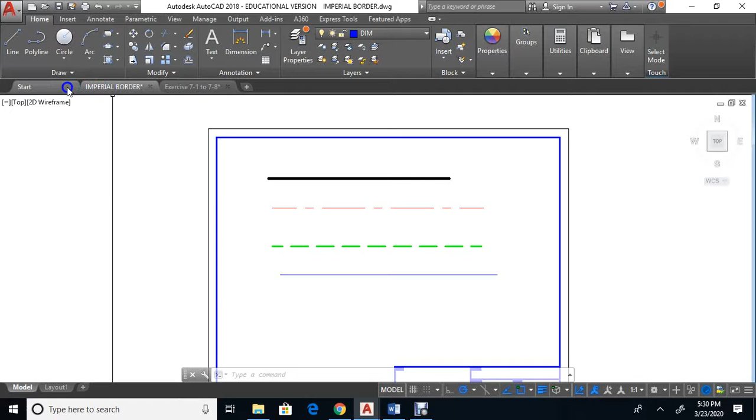In the last video, I showed you how you can use these layers up here to create different line types. Now let's say you start a drawing from scratch, so you don't use my border. Instead, you go to start and do a drawing from scratch.

So just click here, you start a drawing, and you have this grid. I'm just going to eliminate the grid down here by clicking on this. Notice in this case, there are no layers.

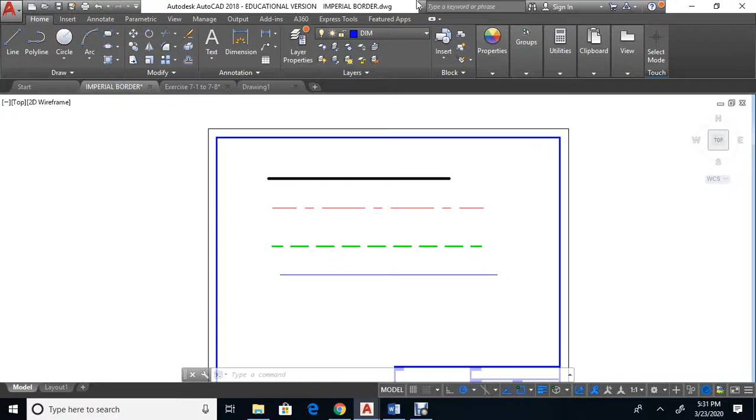Well, let's go back to my imperial border that I created. We'll just click on it. We have several layers I created, so you're always welcome to use my imperial border with the layers.

But if you want to start from scratch and create your own layers, let's go back to start. In Drawing1, we'll go back here. And you don't have any layers, so I am going to show you now how to create the layers.

The first thing you do is click on this little icon here, layer properties. So you click on the layer properties, and another screen is going to appear. On this screen, you can create a new layer by clicking right here. So I'm just going to click there, and then I can call it whatever I want.

So I can call it maybe dashed for dashed lines. We're going to create a dashed line layer. Now over here, I can pick the color of that layer. I click here, and I can pick whatever color I want. There's so many colors to pick. Maybe I'll just pick yellow for this one. I'll hit OK, then I can change the type, the line type here.

I can click on here and load more. So instead of these, you can load more. You can go looking in here for a dashed line, searching until you find a dash that you like. Maybe I'll take this one here, dash 2. I'll go OK, and I still have to pick it.

Then I go OK. Over here it tells you how thick you want it to be printed. So here you can pick the thickness. Maybe that one's 0.2. Maybe the first one here, 0.1, I'll make thicker. I'll click on this and make it thicker like that.

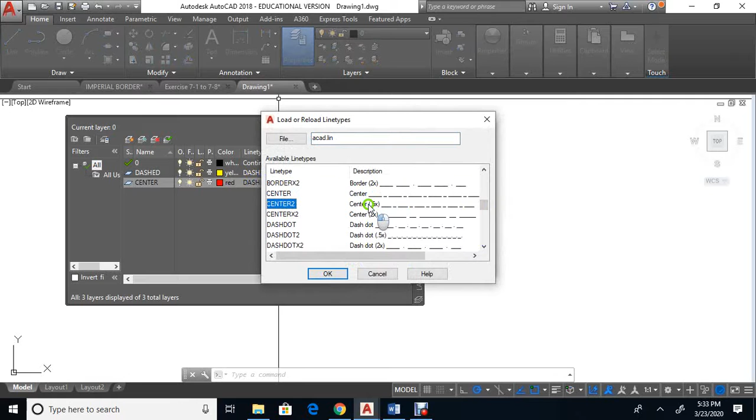I'll pick a center line here. Since it's not here, I'm going to load some over. I come down and pick this center line, pick the 0.5, and go OK. Then I'll make sure I pick the center too, and go OK. I want it probably the same thickness as that. I've got 1, 2, 3.

I'll make one more, so again you go here. I'll make one last one. I'll just call it a crazy layer, make something crazy. We'll pick some color I probably never use, maybe this orange kind of color. You might use it, but I don't think I ever will.

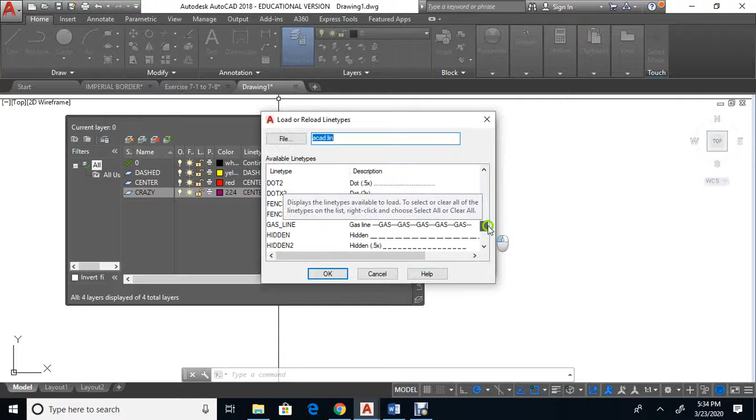I'll pick that. And over here, instead of center, let's load and see if there's something interesting we can use. Let's keep going through. Oh, there's batting. Let's see what else. There's a gas line you can use, HW. Let's use the zigzag. I'll pick the zigzag, click on it, and go OK.

Now let's take a look at what we've done. Let's go back to our drawing, so we'll X this. If you want to come back to this, you can always click on layer properties to return. You can click on one of these and delete them if you want, hitting the delete key or the X over here to remove them.

Okay, there's a new layer button, and there's delete layer right there if you want. So let's go back and see what we created. First, we'll draw our first line using the 0 layer.

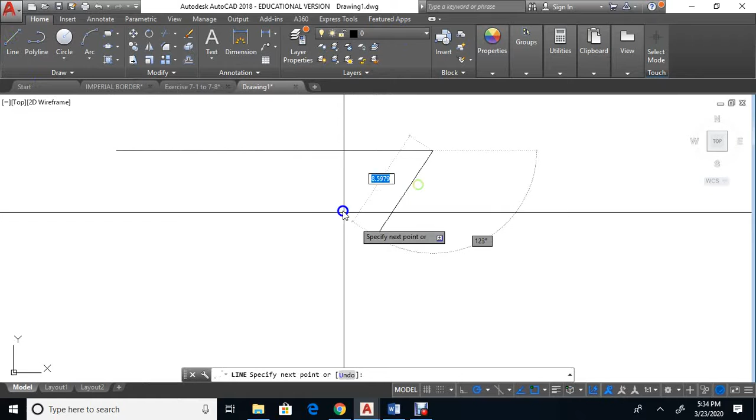Now we'll switch, while we're in the line command, to another layer. We'll switch to the center layer. Let's see what it does. Oh, it creates a red line, which is a center line. We'll go to the crazy layer next. Oh wow, it creates a zigzag line. Then we'll switch over to the dash layer, where it creates a dashed line as you move through.

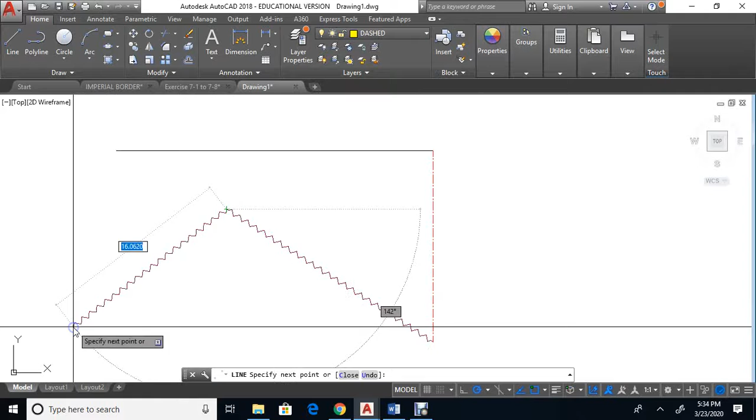Now, if you want to change the size, I will show you right here. You can type the word LTS, linetype scale. You can type it anywhere on the screen. Now let's change the LTS. I'll go linetype scale, LTS, and hit enter after you do it.

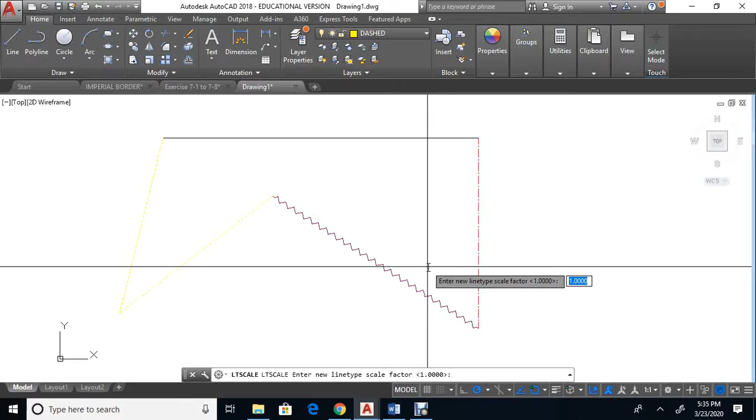Let's try that again, LTS. There it is, linetype scale, hit enter. Let's put 2, enter. Now it makes them more spread out. Let's try again, LTS, enter. Let's go 0.2. Now they're still dashed, still centered, but a lot smaller. You have to zoom in to see them.

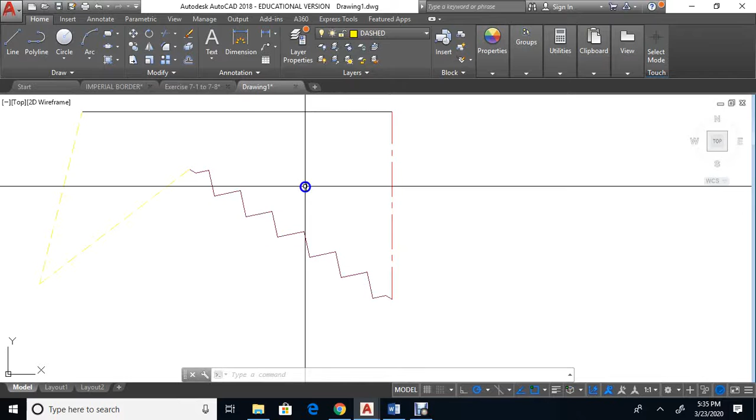Again, let's try LTS, let's make them 4. Here you can barely make out the zigzags and the dash because they're not spread out as much. Okay, and that's it for this video.